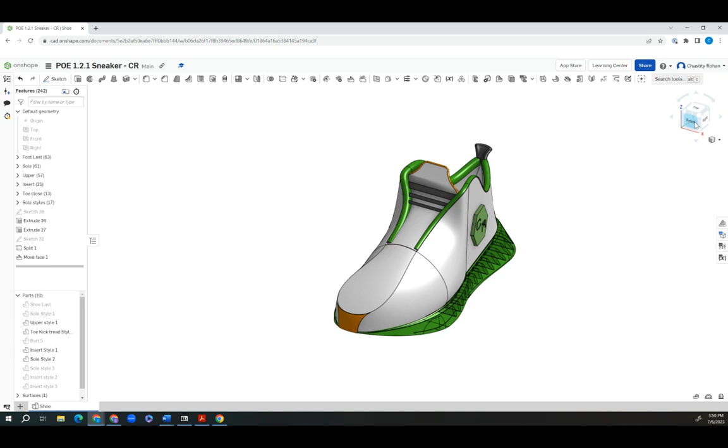One of the most important things when doing a multi-view is you have to pick the correct front view. In other software, you can right click and change your front view. Unfortunately, with OnShape, that's not doable, or at least I haven't figured out how. Notice that your best front view is the one that shows the longest side, the most detail, and gives the best overall shape of an object. So in our case, the side of the shoe is really the best front view when doing a multi-view, and that's going to be important here in a second.

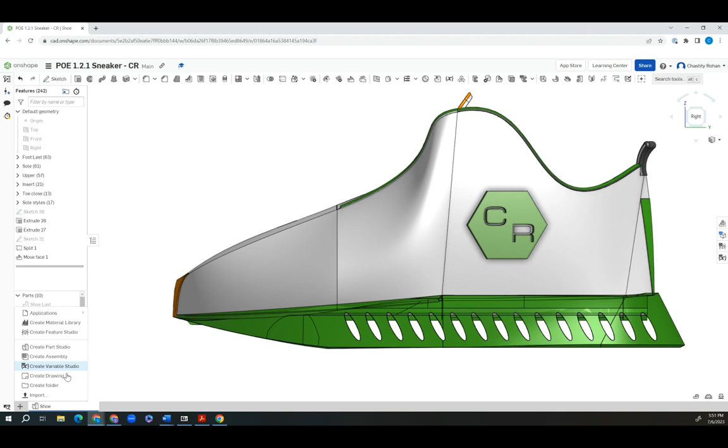So to do this, I'm going to go down here at the bottom and click the plus button, and I want to create a drawing. This is called a drawing file, and we're going to make sure we just use a template. It doesn't really matter which one. I just clicked on ANSI and picked the inch one. Click OK, and it's going to upload a basic drawing file.

Now when mine uploads, it doesn't give me the full assembly, it just gives me all the different parts. So what I had to do is click here, it says Part Studio, and then there's my shoe. So I can actually get a picture of my shoe.

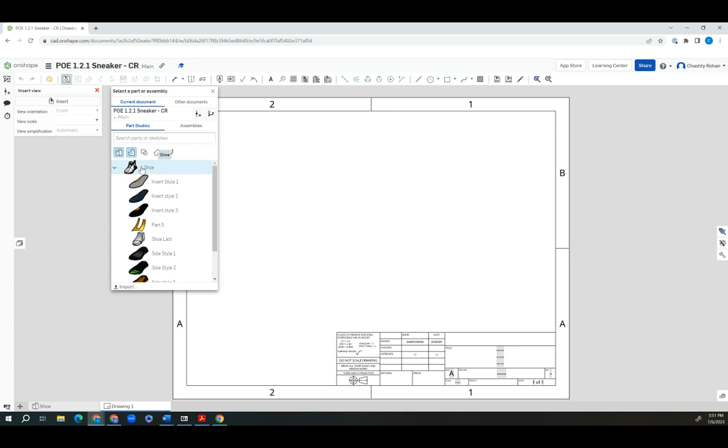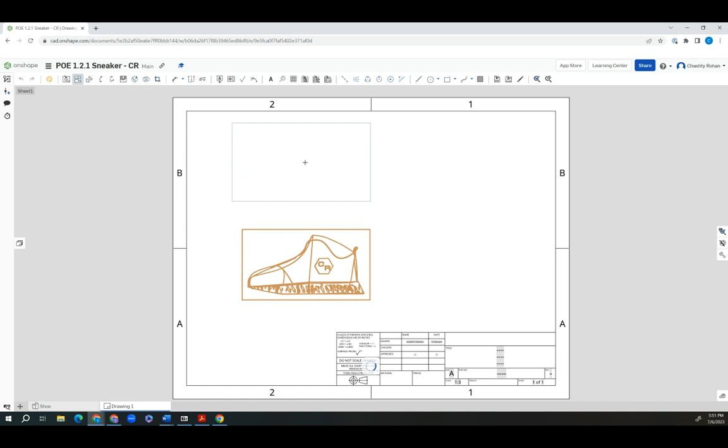Notice when it pops in like this, it's going to give me the view of my shoe from the front. Well, that's not the view I want. I actually want the view from the right side, and that's going to be my best front view. And then above it's going to be my top view.

With this, it doesn't let you do the top, front, right all together. So what I want you to do is go up here and click again where it says projected view. Sorry, you have to click the box first. And then you can click over here to your right and it will give you the back of the shoe in this case, and it should have given me my isometric as well.

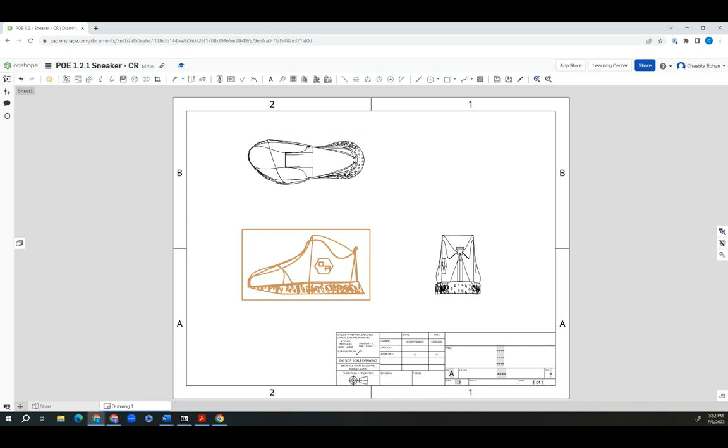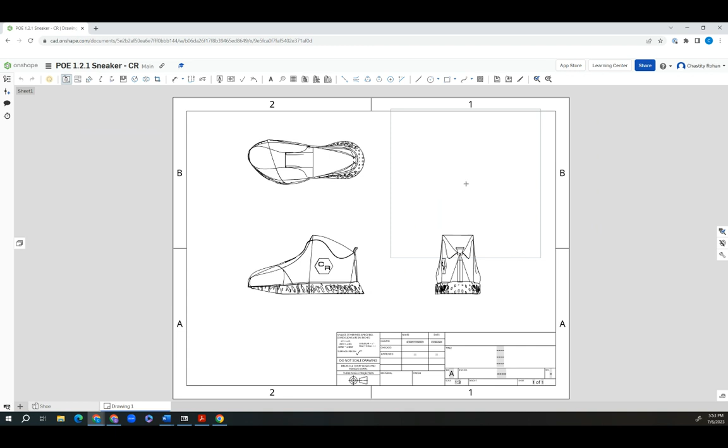Sorry about that. So what we can do is click here, insert view at the top, click on it, and I can click exactly what view I want to do. So I want to do the isometric view. I'm going to put it up here at the top. Now we have a nice isometric view.

The next part for doing dimensioning is you want to make sure you place dimensions. So click the dimension tool here at the top. You can click the furthest edges and get the overall width, do the furthest heights for overall height, and then we can also get the overall depth, the widest point.

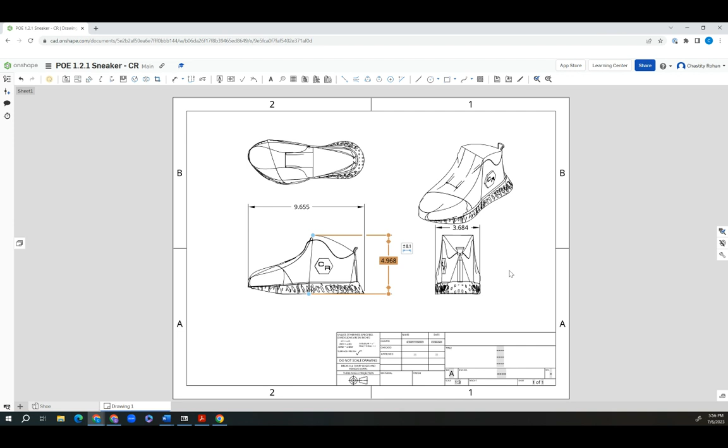If you hit escape, it'll get you out of the tool you're in, and it also gives me a chance if I need to edit anything. I'm not sure why mine are not centered. There we go, it's better. I just clicked on it and moved my little arrows so that this is grabbing that piece and moving it back to the middle where it should actually belong. Then you would go in and put your dimensions for other things, just so you have some dimensions showing that you understand what that means.

One of the other things, notice how close these two are. If I want to move, let's say my original, I can grab it and drag it. If I do that, I need to make sure when I did the projection that came off of there so that it's going to drag with it. Okay, that's a quick version of how to do a multi-view.